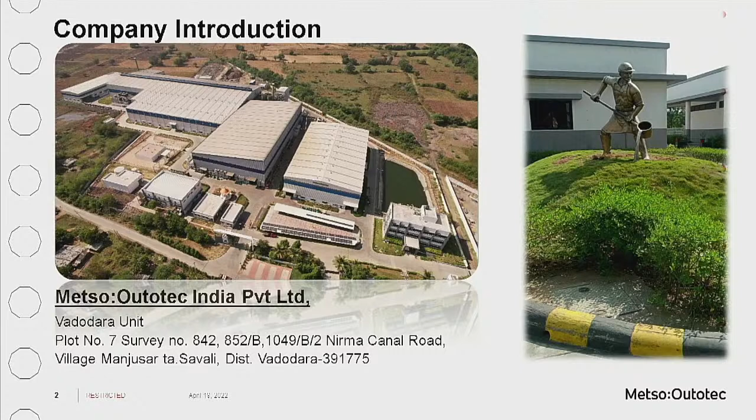Let me start with our company introduction. We are from Metso Outotec, a Finland-based multinational company having two foundries in India. One is in Ahmedabad, in operation since last 25 years, while the second one is in Vadodara, in operation since last 2 years, which was a totally greenfield project. Vadodara foundry has a capacity of 2,000 metric tons of manganese steel casting per month, while our Ahmedabad Metso Outotec foundry mainly produces pump casting as well as metallic mill liners, and apart from this, a few percentage of castings for manganese steel. This is a bird's eye view of our Vadodara foundry.

Let me introduce myself. I am Deepak Anagan, working as an R&D engineer in our Vadodara unit. This presentation will be presented by myself along with Darshan Vyas. First half I will present, and then Darshan will continue.

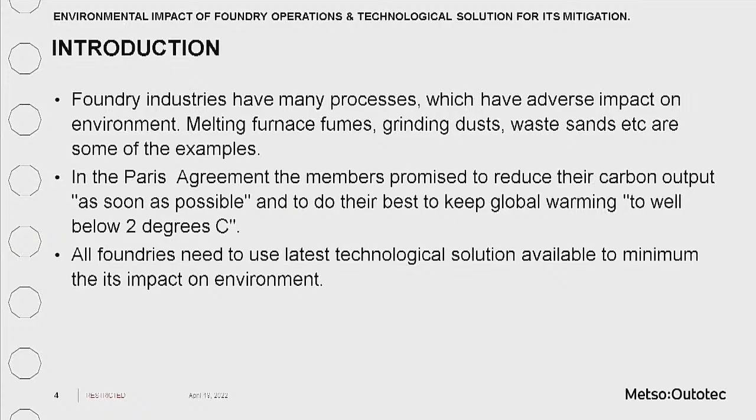Let's start with the introduction. We are all aware that the foundry industry has many processes, starting from pattern making to casting dispatch, and all these processes involve some kind of impact on the environment. For example, melting furnace fumes, grinding dust, as well as dumped used sand that creates pollution into the environment. The Paris Agreement was held a few years ago, during which all member countries committed to reduce their carbon output as soon as possible, and also committed to keep global warming well below 2 degrees.

So to achieve this target, what the foundry industry can do is use the latest technological solutions available in the market. Let's start with what are the processes which cause detrimental impact on the environment.

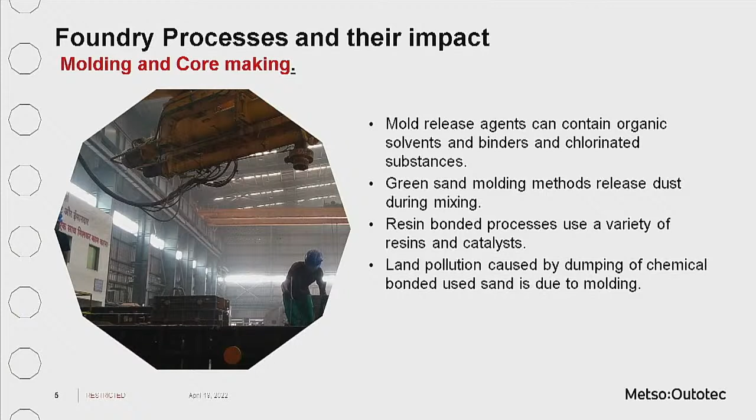One of the processes is molding and core making. In green sand molding, a lot of dust is generated, and in resin bonded processes, a variety of resins and catalysts are used. When we dump that sand, it is harmful for our motherland, creating soil pollution.

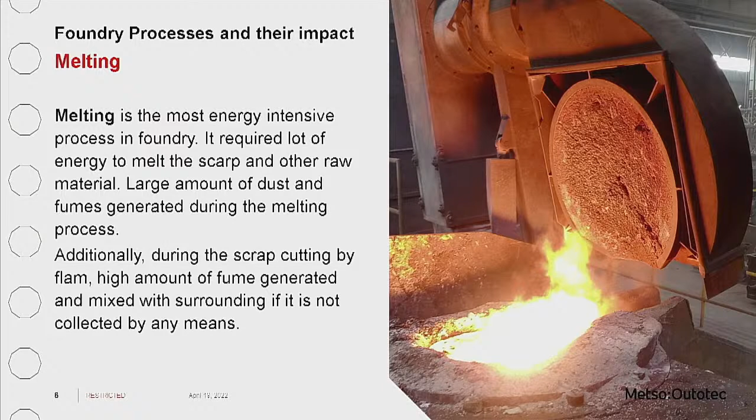After the molding process, if we talk about the melting process, we are all aware that this is a very energy intensive process, and lots of energy is required to melt the raw materials and scrap. During the melting process itself, a huge amount of fumes are generated. In addition, before melting, when we do scrap cutting by any thermal means, that also creates a tremendous amount of fumes, which need to be captured by any means to avoid contamination to the environment.

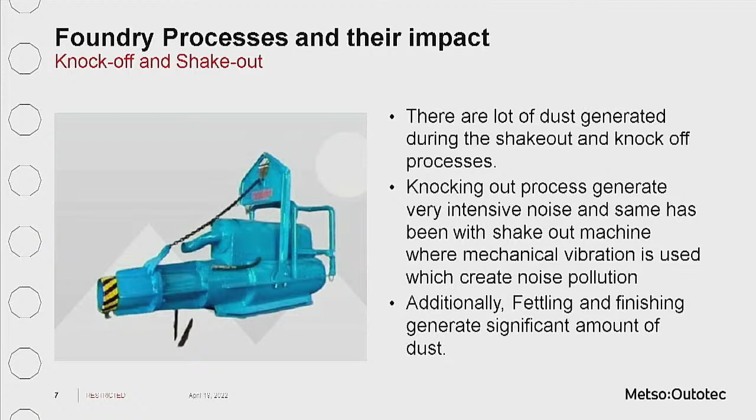If we move forward, knockout and shake-out processes also create lots of dust in the foundry, and we are all aware about the environment at the knockout and shake-out area. That generates very intensive noise, and same with the machine where mechanical vibration is used, which also creates noise pollution. Apart from these processes, the fettling and finishing process also generate a significant amount of dust.

So here we have summarized the types of pollutions and what processes are involved to impact pollution. First is dust, as I discussed earlier, created due to melting, knockout, and shake-out processes. Apart from that, movement of scrap, furnace charging, and shake-out all generate dust. Also, the pneumatic transfer of sand creates dust.

If we talk about fumes, obviously the scrap cutting activity as well as the melting activity generate fumes. Apart from that, when we transfer the mold and pour the casting, fumes are also created. The third one is odor. It is generated in casting and mold cooling, as well as during sand mixing. During melting, spraying, and coating activity, odor is also generated.

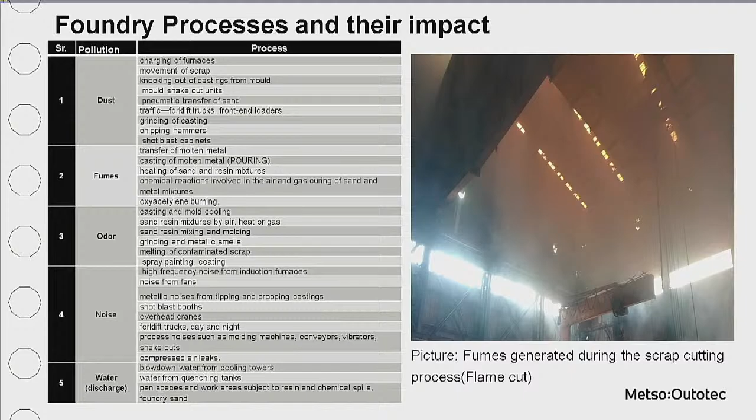The next one is noise. It is generated, as we discussed, during knockout and shake-out machine operations. Apart from that, the high frequency induction furnace also creates noise, and shot blasting booths and overhead cranes are a few other sources of noise pollution.

The fifth one is water - water from the cooling towers, as well as the foundry treatment process like water quenching, is also creating pollution. Here on the right hand side, the picture shows fumes generated during scrap cutting processes in the foundry.

So this was overall the process that creates trouble for the environment. I would like to draw your attention toward the latest technology that can help us minimize its impact.

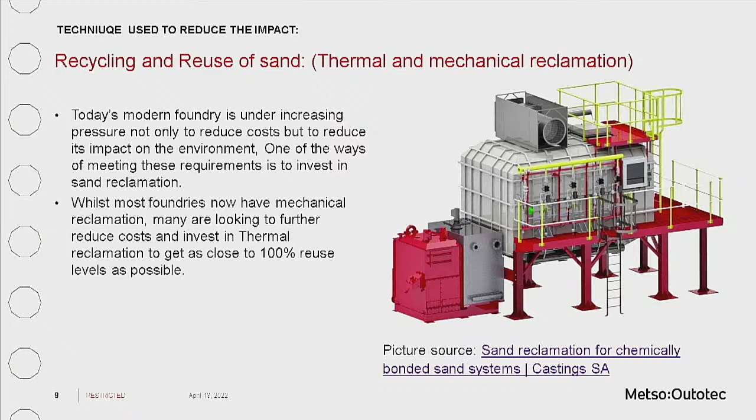The first is in the molding area when we use sand - recycling and reuse of the molding sand. In today's modern foundry there is tremendous pressure, not only for reducing cost, but the laws related to environment are getting stricter, and that triggers the foundry to invest in reclamation of the sand.

Nowadays, most foundries have mechanical reclamation, but now foundries can use the thermal reclamation unit to reuse maximum amount of sand in the foundry, so they can minimize the use of natural resources and reuse it very well.

In the thermal reclamation process of the sand, most of the binder and organic materials are removed by the oxidation process in the chamber. First, the sand coming from the mechanical reclamation plant passes through the cleaning tower, and at that time most of the metallic particles are removed before it enters the thermal reclamation unit.

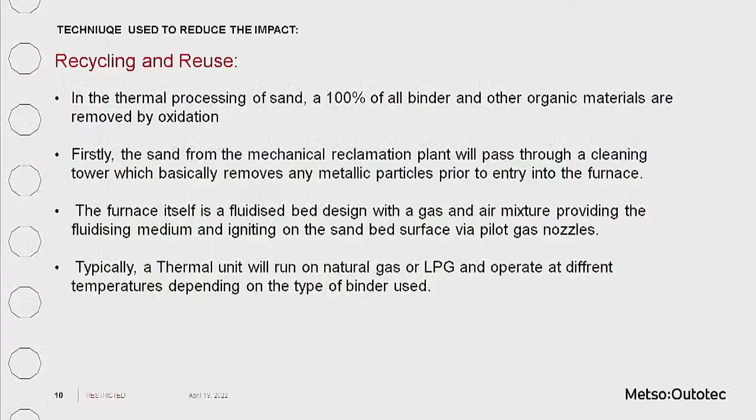So the thermal reclamation system itself is a fluidized bed design with a gas and air mixture providing the fluidized medium, igniting the sand bed via gas nozzle. Typical thermal reclamation systems use natural gas or LPG, and operate at different temperatures depending on the binder used.

So this is a very important technology. By using this, we can reduce the use of sand, and we can also save the environment.

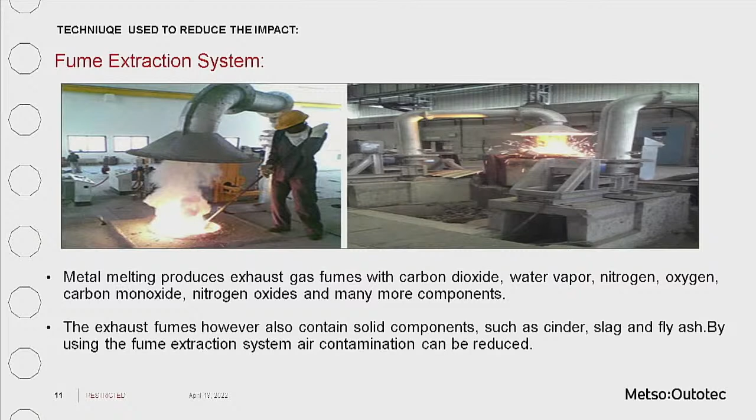The second one is a fume extraction system. Here we can see the old-fashioned extraction system some foundries use, and the metal melting process generates gases and fumes containing very harmful elements. Apart from that, very fine particles of solid component are also generated during the melting process itself, and these need to be captured by any method or technological solution available in the market.

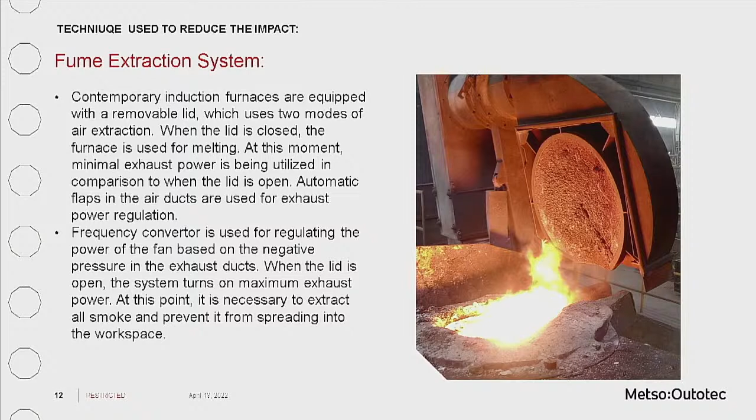So nowadays, most new furnaces are equipped with a removable lid, and that furnace operates in two modes. First, when the lid is closed, most of the melting happens, and the furnace operates at minimum exhaust power, and that lid is removable.

So when that lid is open, the furnace operates at maximum exhaust power, because at that time most of the fumes need to be captured.

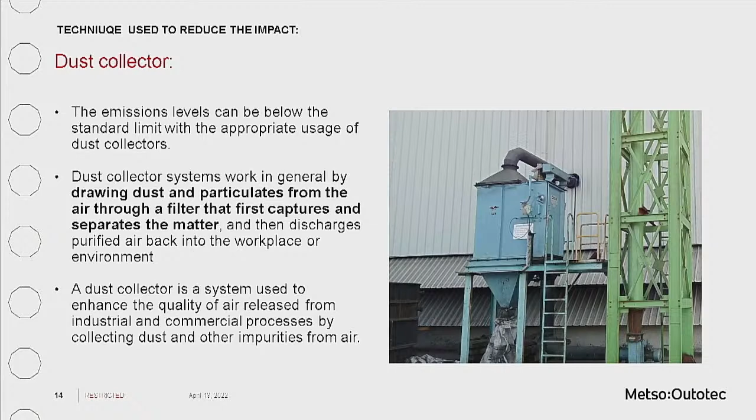Apart from this, dust is also one of the major factors we have to reduce at our molding area, shakeout area, and reclamation unit. Also during sand transferring by pneumatic process or old conveyor system, lots of dust is generated during this process.

So for dust we can provide dust collectors. At Vadodara Foundry, we have installed various small and large dust collectors in various areas. These dust collector systems work by drawing in dust and particulate matter like PM10 or PM2.5, filtering it through filter media and bag filters, separating the particulate matter, and discharging purified air back into the environment. The basic components of a dust collector are blower, dust filters, bag filter, auto cleaning system, and dust removal system.

In foundries, dust collectors can be used at many places like molding area, reclamation unit, mixer area, and shakeout area. We can also put dust collectors at the fettling area for grinding dust control. Also for fume generation at gouging and welding areas, we can provide fume extraction systems. Portable fume extractors are available in the market, so we can reduce fume as well as dust using this technique.

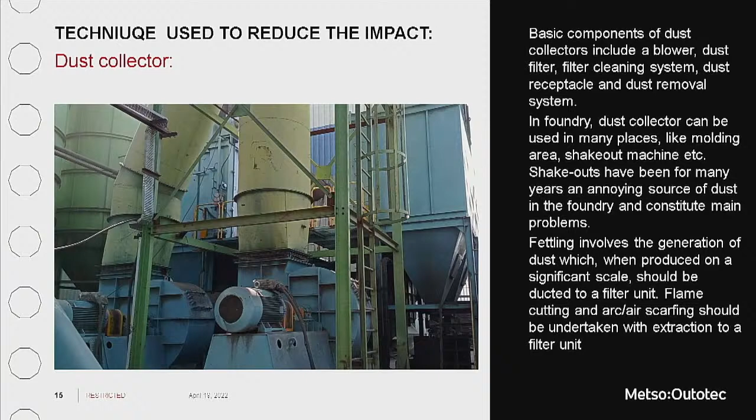Another area of concern is water pollution. At many chemical industries as well as foundries, lots of water effluent is generated. So we can treat our water effluent in two major parts of the treatment plant: the effluent treatment plant and the sewage treatment plant.

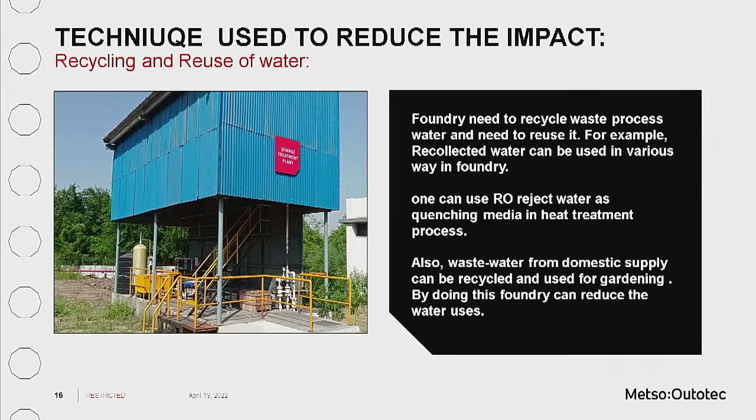At Foundry we have a zero water pollution policy. So we installed an STP, sewage treatment plant, to reduce and recycle domestic water generated from the canteen, wash area, and toilet area. First water is collected at soak pits, and after that by gravity it comes to the STP plant where we have primary, secondary, and tertiary treatment. After that we recycle our water for development of the garden and green belt.

Also we can use RO reject water which has high TDS in nature. We are using RO reject water in our quenching media at the heat treatment process. Also wastewater from domestic supply can be recycled and used for gardening, and by doing this we can reduce water usage as well as pollution.

Many other new technologies are in the market, like energy efficient equipment with the latest technology, which foundries need to adopt to reduce energy consumption. Ultimately this will reduce the impact on environment. For example, high efficiency burners are available for complete combustion of LPG as well as PNG gases in the heat treatment area. In addition, some foundries use refractory coating on heat treatment furnace lining. This coating has very low thermal conductivity, so it reflects heat back to the furnace, reducing heat losses and also reducing LPG gas consumption.

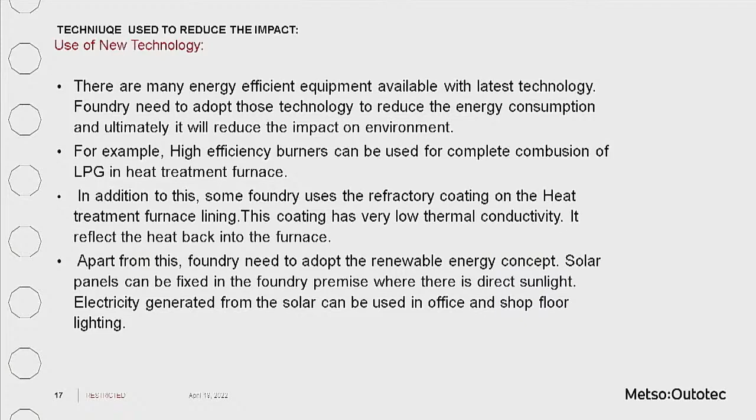Apart from this, we can use LED lighting instead of normal lighting, which will also reduce our energy consumption, and indirectly contribute to minimizing CO2 emissions generated at power plants and the electrical sector. Apart from this, we can commonly use the concept of rainwater harvesting to limit water use.

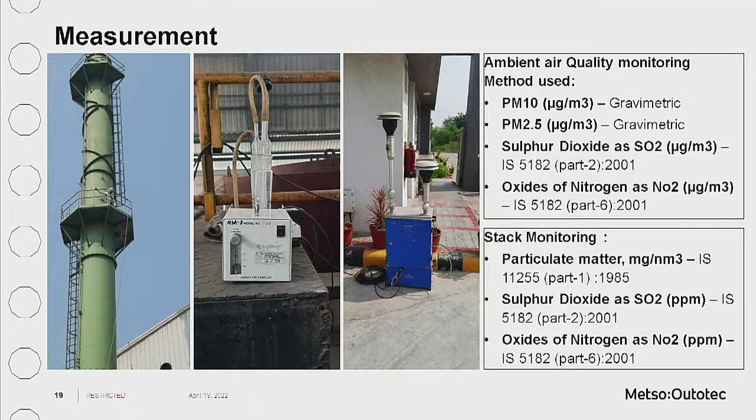We have installed various technologies, but if we cannot measure pollution factors, we cannot minimize the pollution source. So at Metso Outotec we monitor ambient air quality following the methods of PM10, PM2.5, sulfur dioxide, and oxides of nitrogen. At stack monitoring we also monitor particulate matter, sulfur dioxide, and oxides of nitrogen.

Also for the sewage treatment plant which we use for the gardening area, we have to monitor biological oxygen demand, total suspended solids, pH, and residual chlorine.

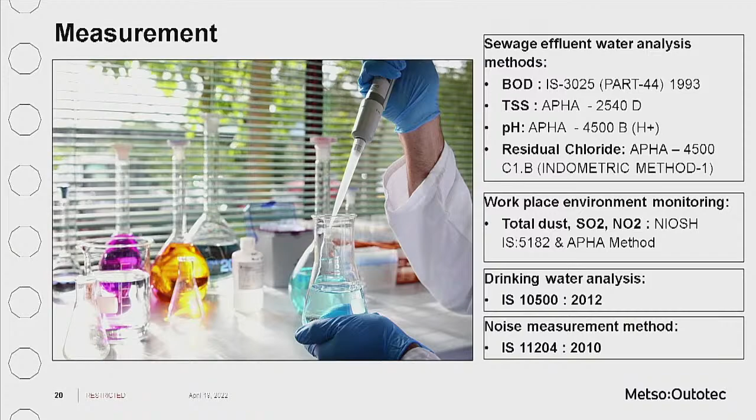To minimize the environmental impact on ground as well as biota, workplace monitoring is also done, in which we are monitoring total dust, sulfur dioxide and nitrogen dioxide. Drinking water as well as noise monitoring will be done by this standard.

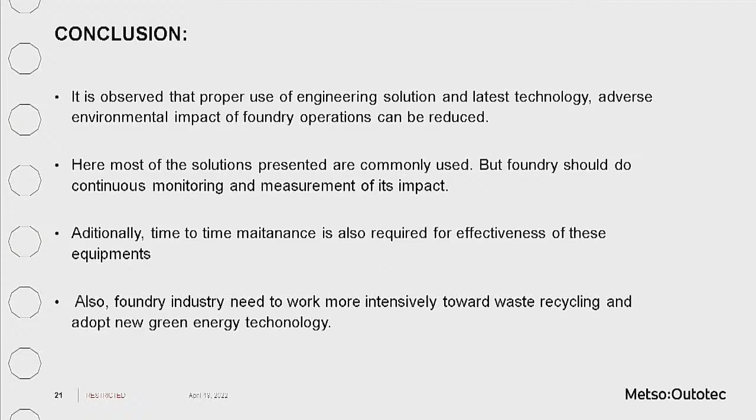So we can conclude that it is observed that with proper use of engineering solutions and latest technology, the adverse environmental impact of foundry operations can be reduced. Most of the solutions presented here are commonly used in almost all new foundries, but foundries should do continuous monitoring and measurement to reduce their impact on environment. Additionally, time to time maintenance and preventive maintenance is required for effectiveness of this equipment and technology. Also, the foundry industry needs to work more intensively towards waste recycling and adopt new green energy technology like solar panels.

Thank you very much.

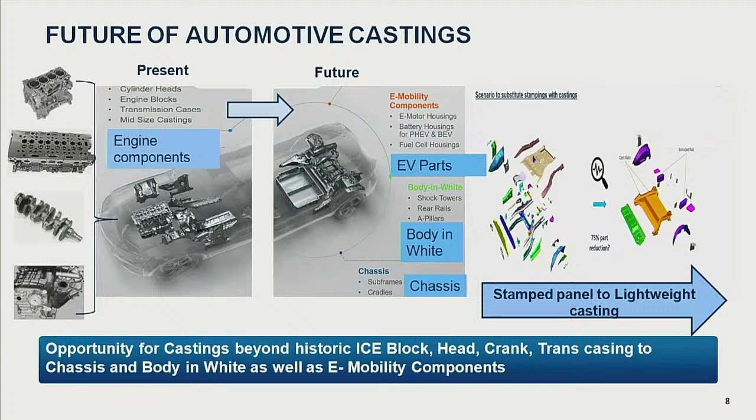What's the future? Casting industry for automobile historically speaks about 4 components: head, block, crank, and gear case housing. But from present to future, if you look at electric vehicles, there's a significant increase in aluminum die casting, high precision aluminum die casting. This includes e-motor housing, battery housing for plug-in hybrid and battery electric vehicles, and fuel cell housings. Interestingly, a lot of body components where we see sheet metal now are also getting changed to complete aluminum die casting - body in white, shock absorber mountings, rear rails, A-pillars, from the driver's seat left and right A-pillar, B-pillar and C-pillar, full subframes and cradles where batteries and the trans-casing are mounted are also getting developed towards lightweight casting. This is a significant step change for where the casting industry needs to get ready for the future, because a lot of talk is about if internal combustion engines get phased out, what's the future of casting? But this is the future.

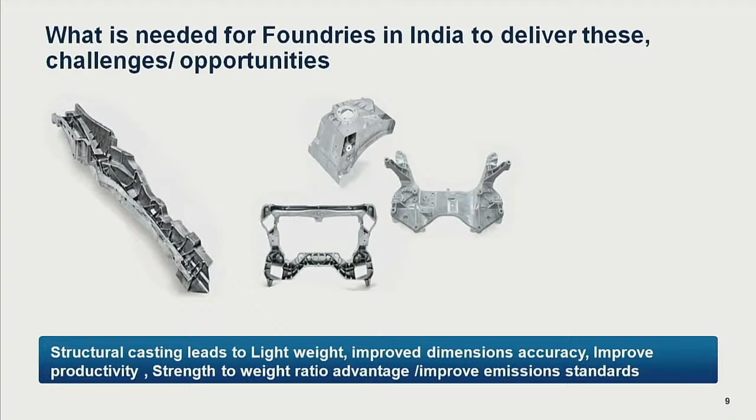Some examples of high precision aluminum die castings: the right-hand side picture is about the front cross member where the powertrain component sits, and the shock absorber tower and the rails. These are all built with aluminum die casting. So you don't have to manage complexity, don't have to manage welding parameters, etc. It's lightweight, which improves emissions as well as strength-to-weight ratio and fuel efficiencies.

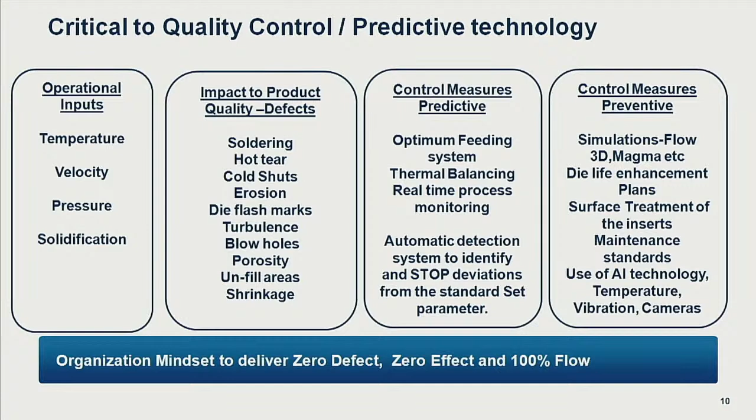To deliver this, what are the critical to quality parameters? If you look at input in the foundry industry - temperature, velocity, pressure, and solidification - these are the critical input parameters. When we talk about SIPOC, it's all about how you measure your input so that your output is predicted, good or bad. When bad is predicted, we correct so the customer doesn't get bad quality. If not managed well, it impacts product quality with defects - hot tears, cold shuts - these are all foundry terms, so I won't get into detail. It costs a lot to the foundry as well as the OEM.

Control measures we can put in place are feeding systems, thermal balancing, real-time process monitoring, AI technologies, and automatic detection of process parameters. If anything goes wrong outside the control limit, the process stops producing bad quality parts. What can be done at pre-advanced stages includes simulation, flow, Magma, die enhancement, surface treatment, AI cameras, vibration monitoring, heat temperature monitoring, etc. When things go wrong, it's a major cost to the company, including the OEM as well as the foundry, and it causes recalls, bad brand images, etc. So if we have to get out of this, I think the way is to focus on input and have a very solid quality process control.

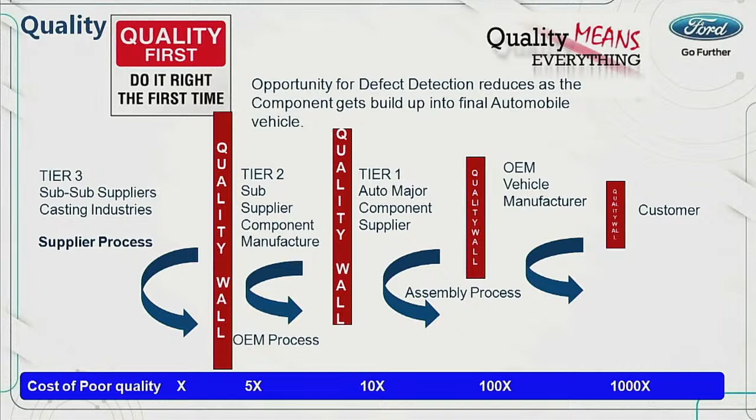Very interesting chart here, and this actually signifies the cost of poor quality. So far right is the customer, and then start with the tier 3 sub-supplier. What you see, the red walls are the quality walls and checks. As we get closer to the customer, the wall gets reduced, so our opportunity to detect the defect gets actually reduced.

And below, the cost of poor quality multiplies, sometimes 1,000 times. So if there is a porosity in the casting and there is an engine change, the complete engine change gets sent back to the foundry. Now if you have complete process parameters - temperature, process, all those parameters checked and controlled - you can detect this, so that you can stop producing bad quality parts. So cost of poor quality significantly increases as the bad defect goes to the customer.

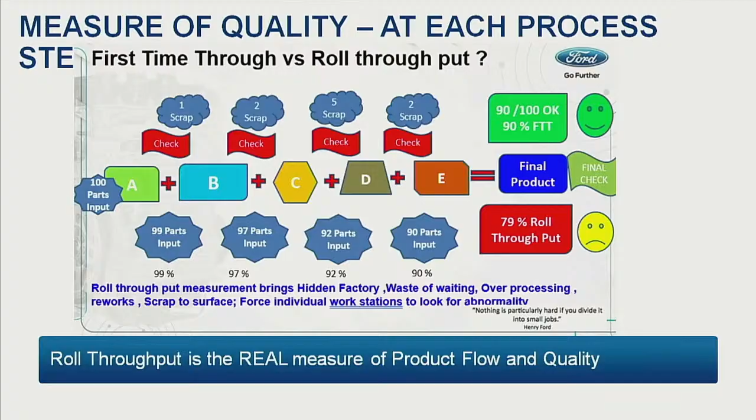If you look at the top side, if you have processes in casting - step A, step B, step C, step D - and if you have a very good check about what you are putting in, what you are getting out, and then do the roll throughput, that's a real measure of roll throughput. Rather than putting 100 parts and getting 90 parts out and saying 90% FTT, that's not the case. For the similar process, if you apply roll throughput, it will be 79%, because you are spending energy, labor, everything to process it, and whatever is in-process rejection is cost and a waste.

So this is where you may want to think about how you want to rejig the measurement of quality in our processes. So with that, I would like to conclude, and thanks to the IFC 2020 team for giving me this opportunity to share my thoughts about future trends in industries and expectations from foundries. Thanks very much. Namaste.

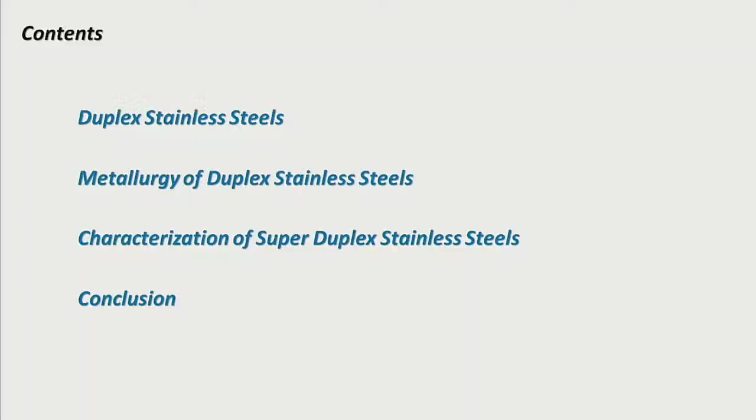So today we will see duplex stainless steels and their metallurgy, along with characterization using various methods like metallography, XRD analysis, SEM and EDS analysis, interpreting the various phases that form, and we will draw some conclusions from that.

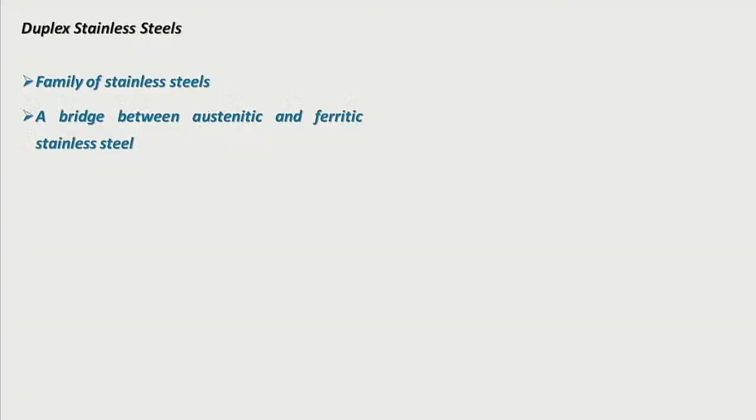Basically, duplex stainless steel is a family of stainless steel. It is a bridge between austenitic stainless steel and ferritic stainless steel. This material basically contains 30 to 60% ferrite phase and the remainder austenite, and it has excellent corrosion resistance for stress corrosion cracking due to the presence of ferrite.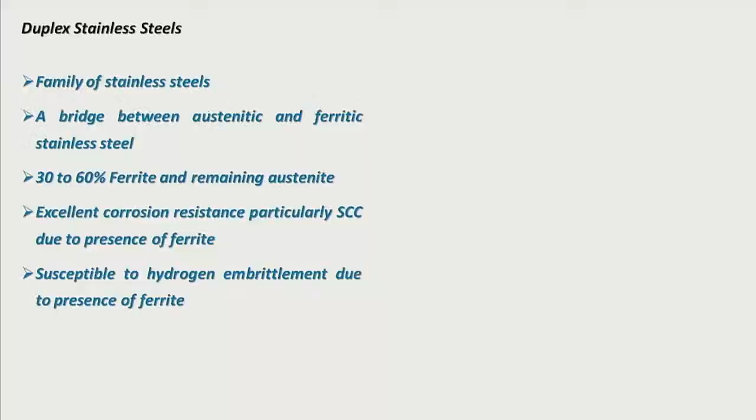However, the same ferrite makes the material susceptible to hydrogen-induced cracking. So this material is particularly restricted beyond application at 350 degrees Celsius because of the formation of various secondary phases, which we will see in the upcoming slides.

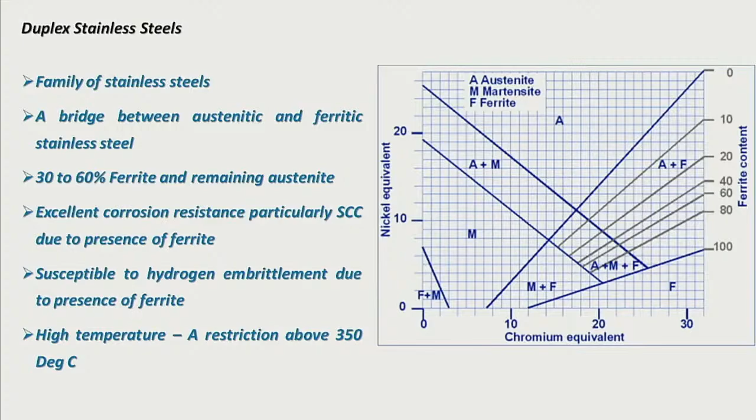Here we can see a graph showing different kinds of stainless steels that we produce. At the top we have austenitic stainless steels, marked as A, and at the bottom right column we have F, which are ferritic stainless steels. We can see the ferrite content A plus F at the right corner, which indicates the percentage of austenite and ferrite, where duplex stainless steel belongs.

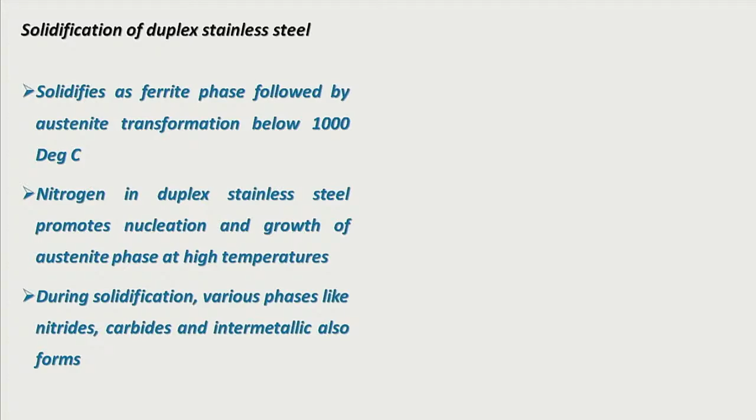The solidification of duplex stainless steel is a typical solidification entirely different from all other steel materials, including carbon steel, stainless steel, austenitic stainless steel and ferritic stainless steel, because here solidification starts with the ferrite phase followed by austenite transformation below 1000 degrees Celsius. The advantage of duplex stainless steel is the addition of nitrogen.